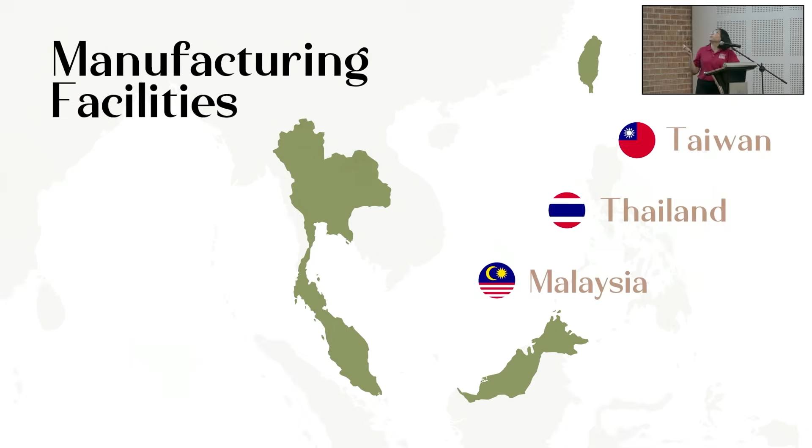We also actively export to the US continent. For the ISO certification, no worries, we are equipped with 45,000, 9,000, as well as the 14,000. We are also equipped with the SIRIM Eco-Label certifications, Singapore Green Labels, as well as the US LEED.

For the showrooms, we have 2 showrooms under the Suzuka HQ governance. The first one will be our HQ office, the manufacturing plant, and also the showroom in Klang, Setia Alam. Another one is in Mont Kiara, Wisma YNH.

The other showrooms are actually under our cooperation with dealers and distributors. We have worked along with developers like SP Setia, Sime Darby, Eco World. We are also working with some retails, maybe some hotels like JW Marriott and some Agodas, and the car brands also.

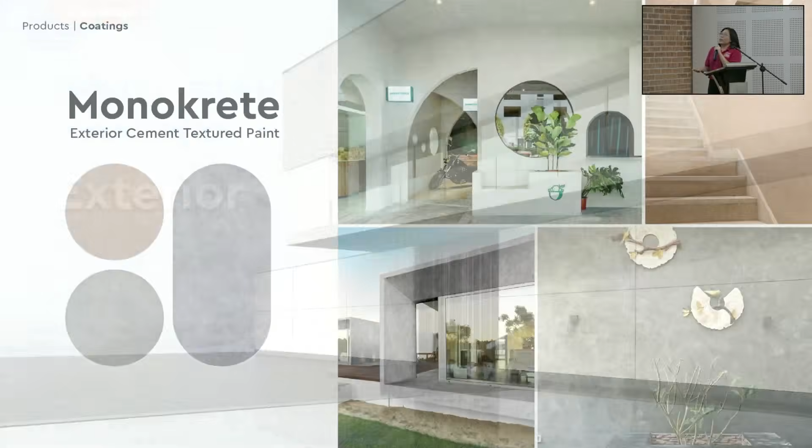For wall finishes, you can always choose between these selections. For the coatings, we have series and solutions for interior as well as exterior. For exterior, we have this cement texture finish. In the market, I think we're the only one with this solution for exterior, basically mimicking the cement texture.

It's low in VOC and it's water-based paint. It's also applicable for the ceiling, meaning if you have any semi-outdoor area, you can use this solution for the wall up until your ceiling.

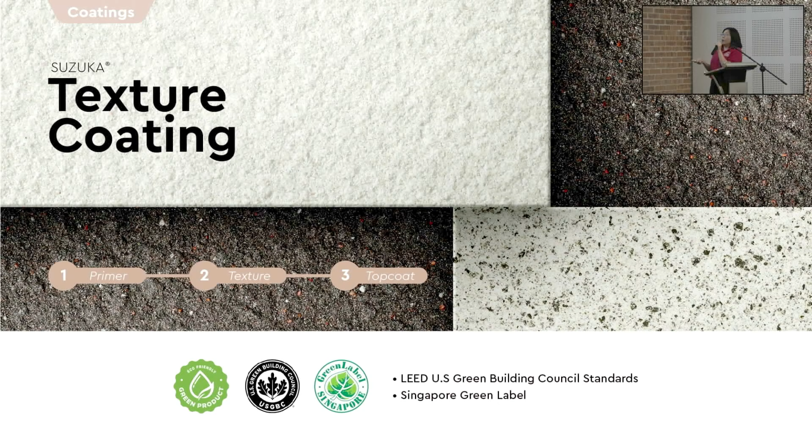Another one is the texture coating, which is quite common in the market, sometimes called spray granite. This one also has green label certification, no worries. Basically it has 3 different textures, meaning 3 different roughness levels.

The first one is the magic granite, which is the roughest amongst all. Only this series has the gold mica, because the particles are big enough and our gold mica almost mimics their black dots. If I put the gold mica in the other 2 series, it will look odd.

So the stony coat is the middle roughness, and the ceramic coat will be the sandiest version. These are all actually for exterior.

Can it be used for interior? My advice is better not, because it's quite rough. But if you would like to use it interior, maybe above the head portion, or something like a feature wall where you have something in front that can block it - this is for safety issue - otherwise choose the finest one, the ceramic coat.

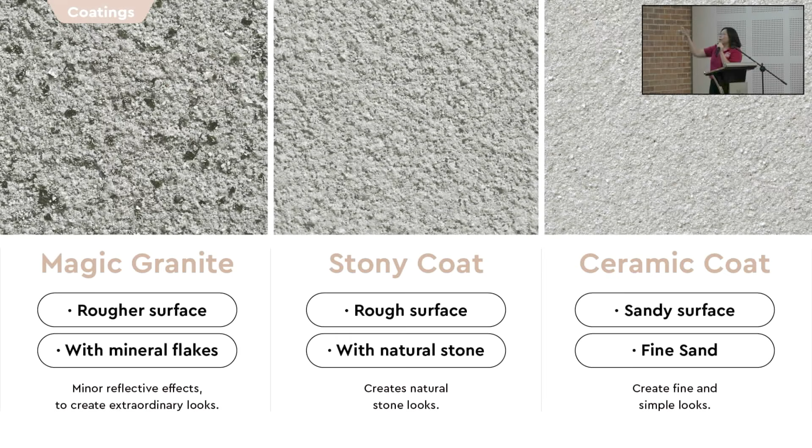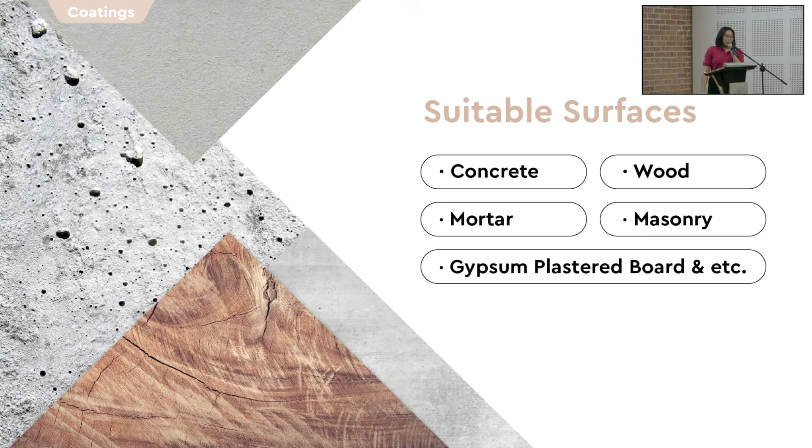It can be used on concrete, wood, mortar, masonry, gypsum, plasterboard, everything, except metal. For metal, if you would like to use it, the only solution we can allow at the moment is stainless steel, 304 or 316. However, please let us know earlier, because we might need to change the primer into a solvent base.

So it's quite resistant to stains, and quite easy to wash. Just use a low pressure water jet and that will do.

So if anyone is very afraid of lizards, some architects still prefer to use this range because it can prevent them. This is the feedback they gave me.

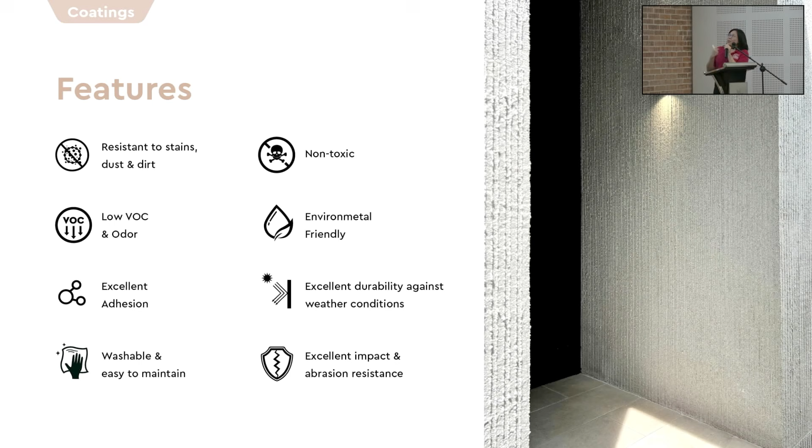This is using the spray method, meaning at curved areas it won't be an issue. However, this is actually at most 3mm thickness. So if you would like a very deep groove line or any recess, please build the structure yourself, and we will spray accordingly.

So the groove line is actually created by their own partitions, and we just spray accordingly. This is also just 3mm, meaning it will follow exactly your substrate.

This is not a design, this is by their surface. So if you would like another type of design, something like stencil or brick types, we can create groove line designs too, following your intervals and your design.

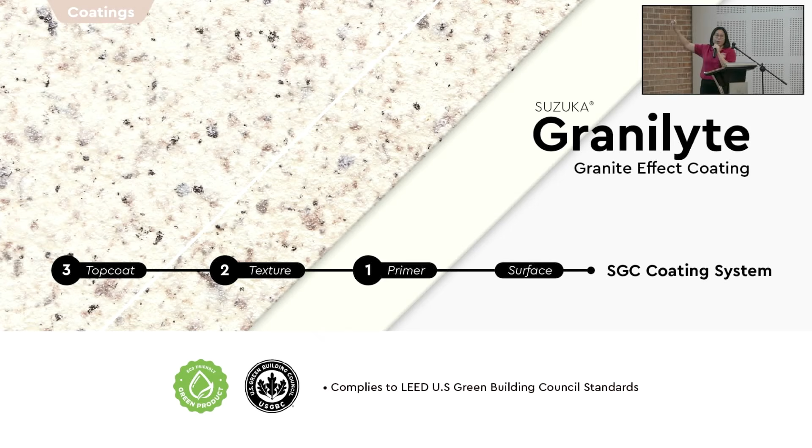So that previous one is rough, by natural stone and minerals, a little bit rough. If you're looking for a smoother texture that mimics granite, this is another solution for you. We call it the granite effect, coating Granilyte. This is how it applies.

By default, our system will be 2 layers of primer, 2 layers of texture, and 1 layer of top coat. So when you receive any quotations from suppliers or the main contractor, please ensure they are really following the system. Otherwise you can get the BQ, or the specification description, from me.

Compared to granite, this is actually lighter, and it's also quicker because it's just sprayed.

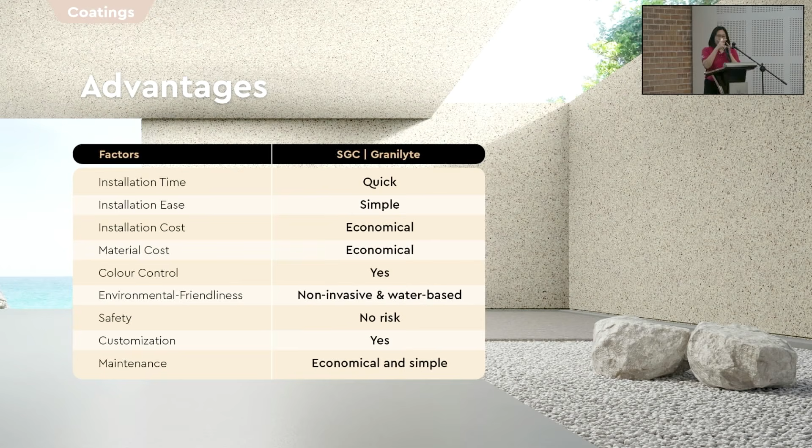This has some elasticity in the coating, meaning if your substrate has hairline cracks, it can somehow still heal up. It's also washable and easy to maintain, resistant to stain and fungus, and it's also a spraying method.

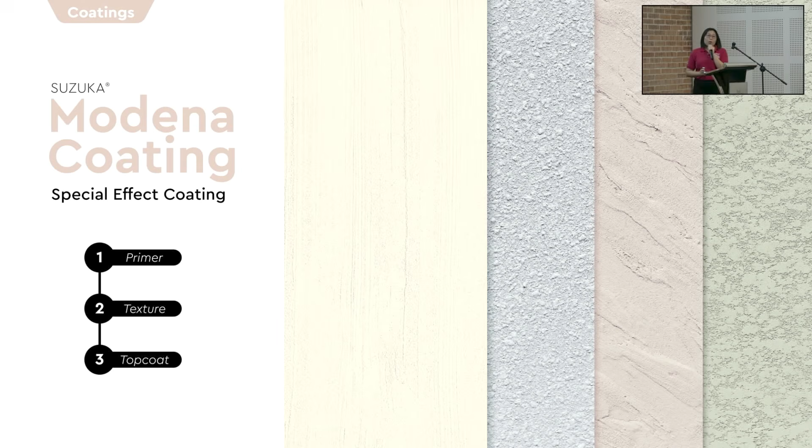For another solution, this is the special effect coating, we call it the Modena. Every single pattern is created with different tools, and it's also a green solution.

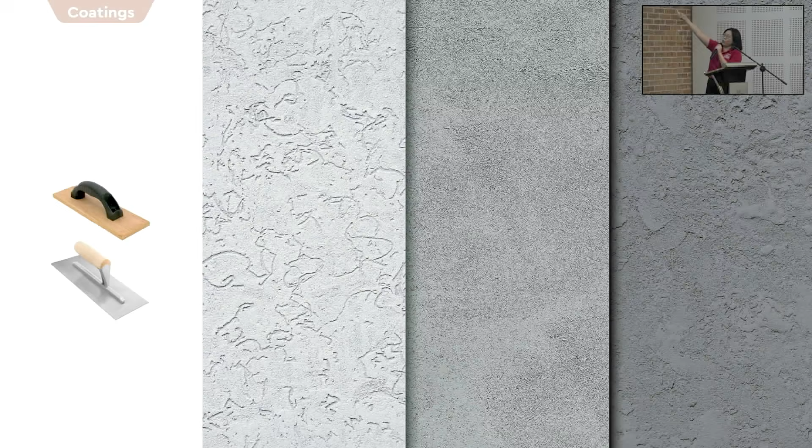These types of texture are created by the wood trowel and stainless steel trowel. These types of texture are created by the trowel and brush combination. This one is by roller, and this one is somehow a combination of spray and trowel. The travertine types are quite common, and this is quite the hot seller texture, I can say.

Every color you see here is available with every texture. Their only difference is the texture, the tools they are using.

If you would like to customize your own color, can it be done? Yes it can. You just give us the piece of the actual color that you need, and we match it here. Since we are the local manufacturer, it's quite fast.

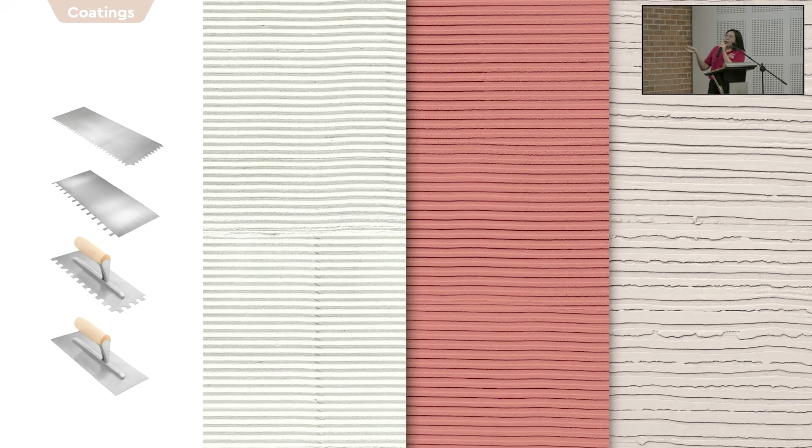This is the comb trowel type. But if you are really proposing this type, we might need to manage your expectations, because it is somehow human workmanship, so there might be overlapping or imperfections happening.

This is how they do it. For the image on the left, you see it's a little bit fluted, a curved fluted design, but actually that is the surface prepared by the client. We just spray on top - this is not created by us.

It's quite fun to play around with different textures to apply to different areas based on your desired design. You might also see this moon shape.

It's quite common in Japanese restaurants nowadays, and also some spas. This is the comb trowel type and the lines type.

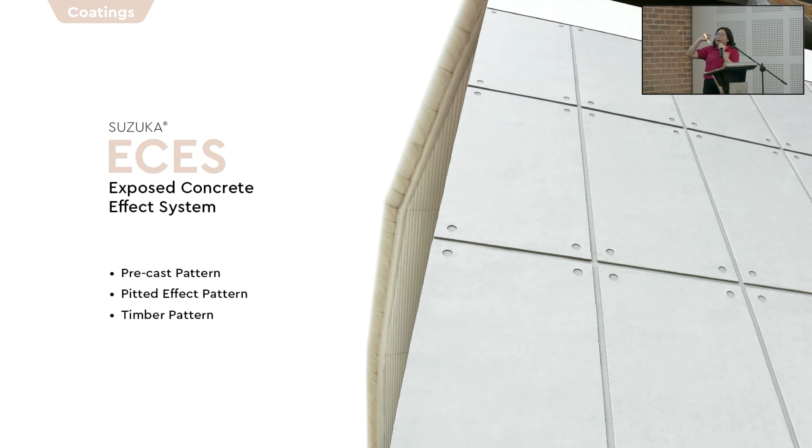Okay, this is another solution we call the ECES, the exposed concrete effect system. So this is not a panel, this is an in-situ coating type. We actually have 3 patterns, and the most popular one is the precast pattern.

So why do we have this? Compared to raw concrete precast, what's the advantage? Raw concrete may have the issue of efflorescence. So how do we counter that? We actually add an alkaline resistant primer to avoid that efflorescence issue.

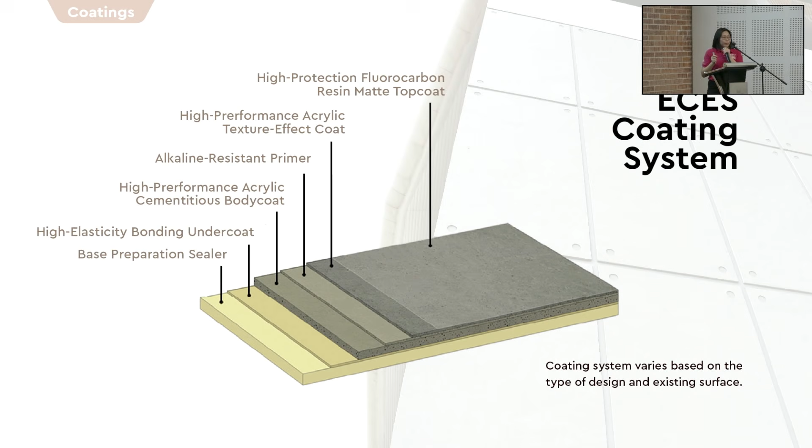So we need to build up the body of the coating to around 4 to 5mm before the texture. To create the pattern, the groove line is created with foam tape. The foam tape is normally 10mm width with 4 to 5mm thickness, so the thickness is at most 5mm.

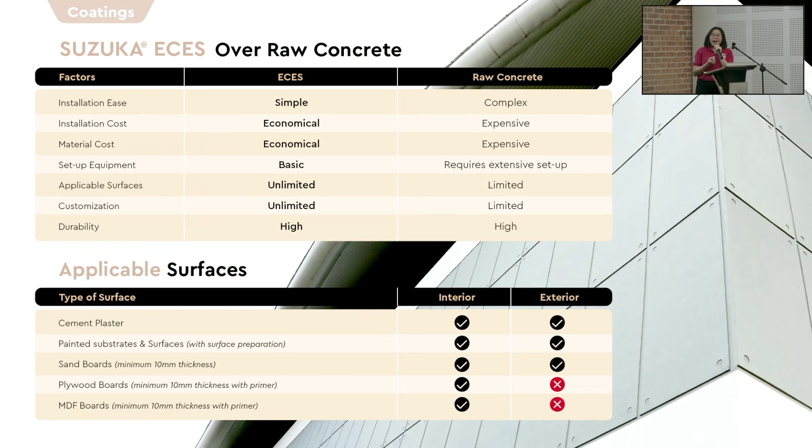So it's quite flexible, because when you do it on site, sometimes you might want 1 meter lines, 3 meter lines, or 2.5 meter lines. If you're using a panel, sometimes it's already pre-made and prefixed, but this one is very flexible on site.

And the buttons, or what we call circle shapes, you can control how far you want it away from the groove line, or you can not want it at all, no problem. For odd shapes, if you're using a panel, the wastage might be high, but with coating we can adjust accordingly.

Also at the very corner, if using the panel type, you will see a 90-degree corner termination, but using the coating, you won't have this issue. You just follow according to your wall.

The second is the pitted effect pattern. This only comes in one cementitious color. It's like holes on a wall.

The third one is the timber pattern, which we create with a silicone stamp. After we build up the body, we just stamp on it. Because it's silicone, it can be used on curved areas too.

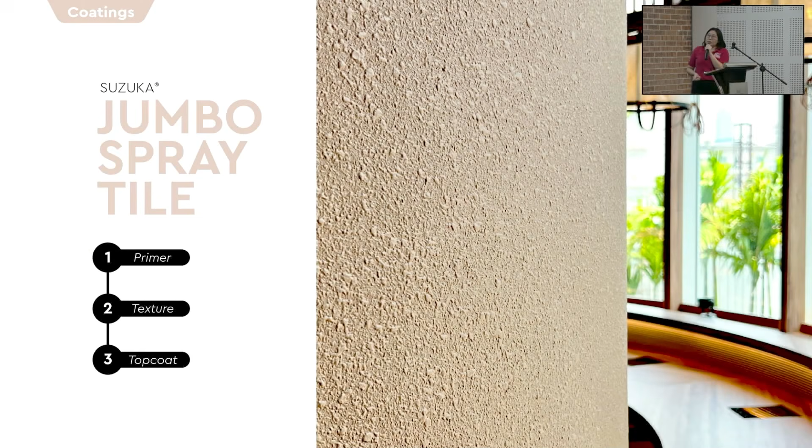You can paint on top afterwards if you want it in other colors. This is very conventional, something some people might not be aware of - Suzuka also does spray tiles, but we only supply them in white.

We have jumbo standard and also head cut types, both available in small, medium, and large size. It just depends on the nozzle size. Afterwards you can paint emulsion paint on top.

So that's all for the exterior. Now we move into the Strato series, which is the interior texture paint. As long as you see Strato, it means the interior paint, and it can be used for interior walls up to the ceiling. It's also a low VOC, water-based acrylic paint solution.

We have quite a lot of range and different textures - maybe you can have a real touch of it in front of the booth later on. I'll just quickly run through. This one is somehow a little bit matte, mimicking the travertine texture.

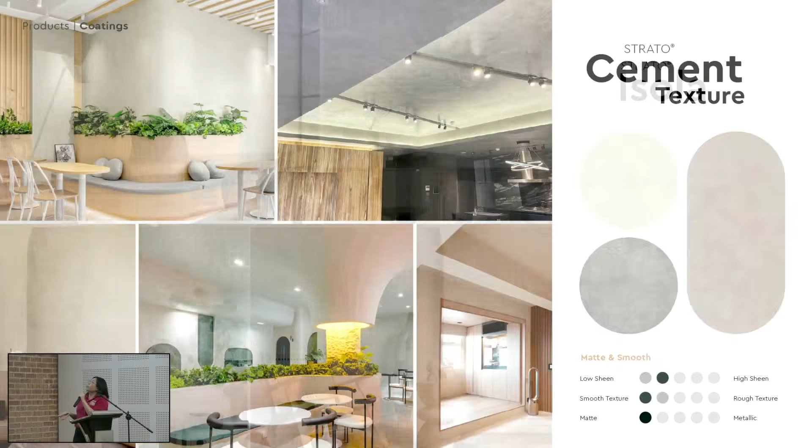We also have cement texture, which is more of a grayish tone. For cement texture with colorful or dopamine tones, we call it Veloce. So this is how they differ.

They're also different in the patterns using different tools. By default it will be with trowel, but if you're looking for a busier pattern or texture, you can use the piccolo. Normally people only choose the piccolo pattern with very light tones, because if you're in a very dark tone and still create this busy pattern, your interior will look like there's no focus.

Because normally you'd like to showcase your furniture, right? It's not about the wall. So it really depends on how you want the outcome to be.

We have the metallic, a little bit metallic - not a very metallic type, just a slight sparkle. You can choose Aurora or the Satin.

We also have a very matte option with a bit of a touchy feel, called Linen. And then we have a very metallic solution we call Merino - this one is rough, and this one is a flat type metallic.

For Organza, by default it will be piccolo because it's too flat - if we don't do piccolo, you won't see any effect, unless someone is really looking for a very subtle pattern, in which case they'd go with trowel. This is the Cashmere, also metallic, and this is the Taffeta, just mimicking the water reflection pattern.

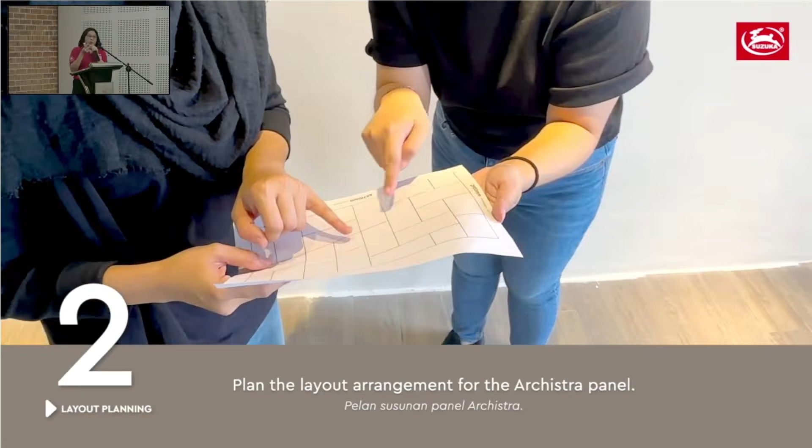So we do also have the wall panel like the PU stone, so have different types of texture. So this is one of it. It's super lightweight. In our showroom, actually 2 girls just installed it.

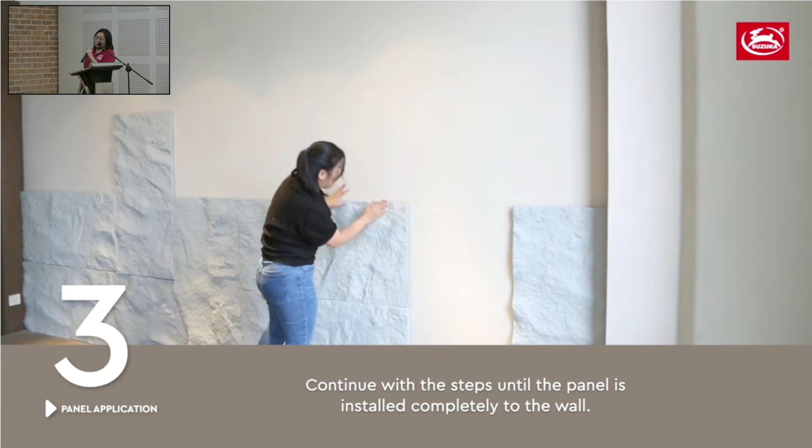Actually play around with a random, or you want to stack it up. It's also a fire retardant rating of B1 DIN standard. So you can actually create a seamless pattern also for some profile.

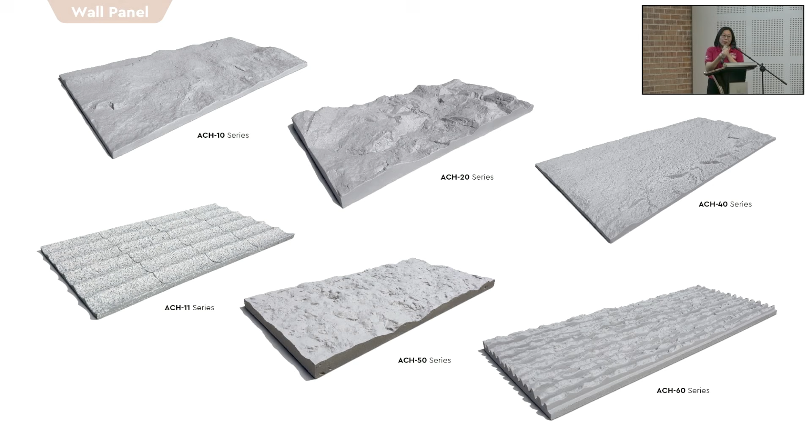So this is a paintable profile, meaning if you don't like our provided colors, you can buy the white colors one and paint your own. Maybe you want to paint it pink color, yellow color, also can. But we have 6 colors lah.

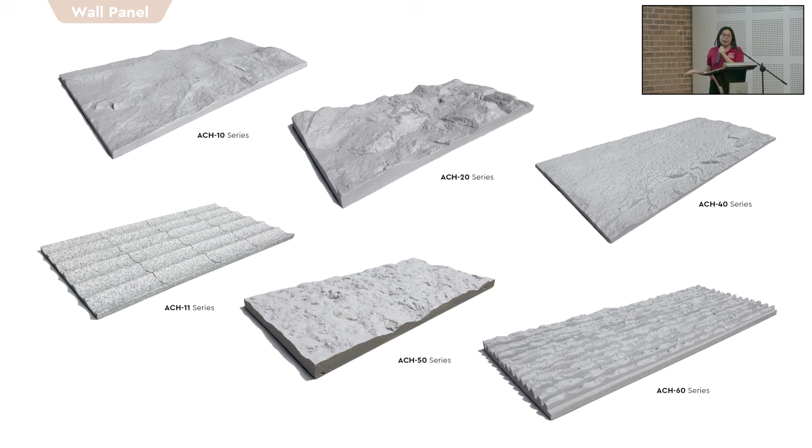So for the top one, it's like mimicking the stones. You can actually mix match the profile, and for the underneath one, this is also more like the fluted types. So you can have the standard one or the seamless one.

So this is how it looks like for the seamless. Mix and match, different profile.

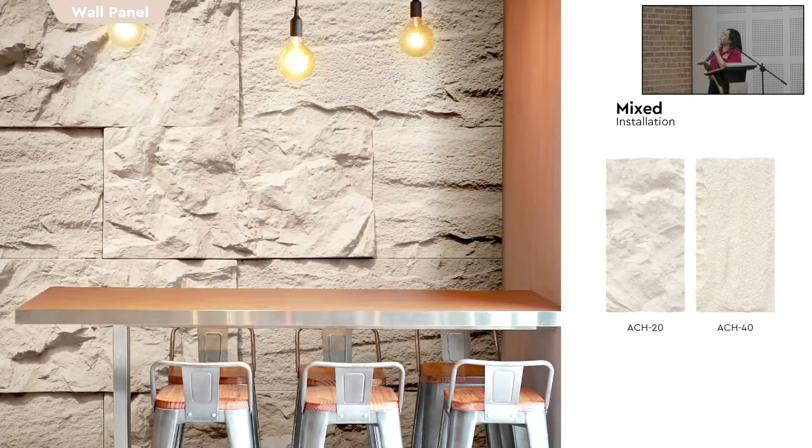So we do also have the brick veneers. I won't go through all, just selected. So for our brick veneers, normally the hot sell is the BK31.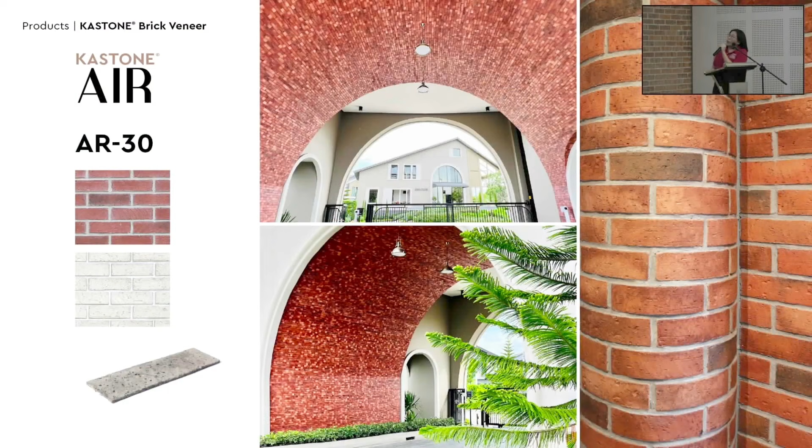So for the KASTONE AIR, this is actually catered for the curve area. Last time before we had the curve or bendable profile, we actually created it by cutting segments, right? Yeah, it won't be nice. So we just purposely created this profile for the curve area.

And then this is for the interior partition wall. If you have interior wall that is with brick structure, still go back to the BK31. This one is only for partition wall because it's thin enough to hold it.

So for stone veneers, we do also have the green labels. Just go through this one. It is with random shape.

So if contractors are only buying and installing themselves, like some tile layers, make sure they dry lay it once for you first before they put it on, because we've encountered cases where they actually put all the big ones at the top and the small ones at the corner. Yeah, this is somehow not the accurate way. To prevent that, make sure they dry lay it once for you first.

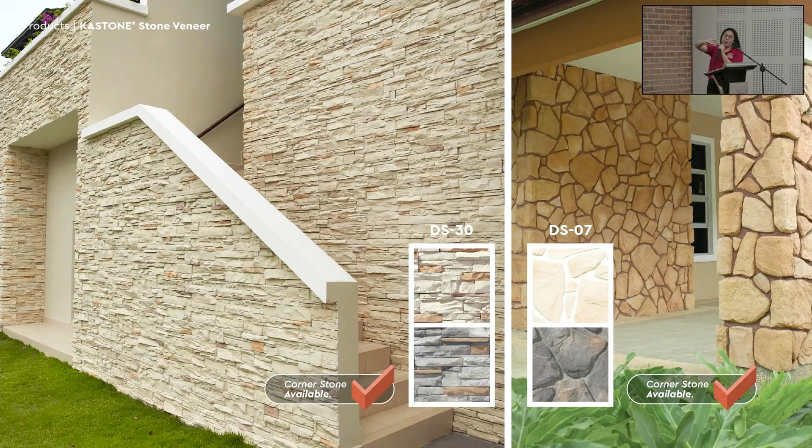So we do have the other stone veneers as well, maybe you can check on our website. So these are the random ones with the corners.

We do have the garden pavement stone as well. We just put it on top of the greens. We have different profiles.

So this is the last one, the KASTONE EG, playing around with the geometry. If you place it like a diamond shape, diagonal, or the straight one, it will create a different effect, especially exterior, because we play around with the sunlight.

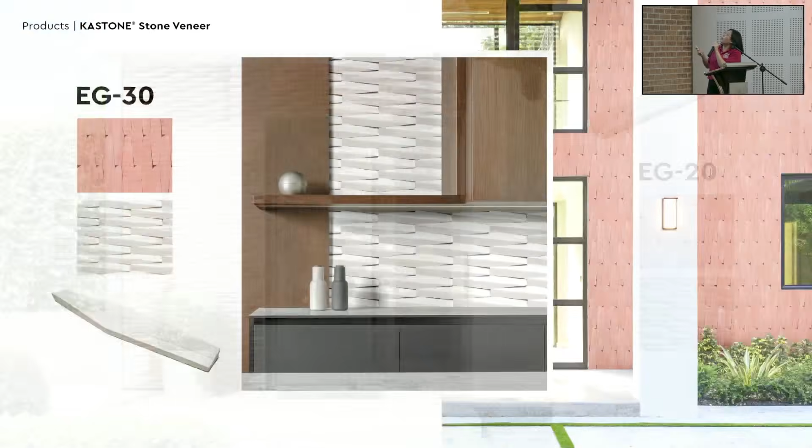So this is the feather light, the small feather, big feather, horizontal or vertical, it depends on you. So this is the floated type. Yeah, this is not a floated panel, it's actually made up of clay, cement and sand. So it somehow has some weight. Please don't put it on a partition wall.

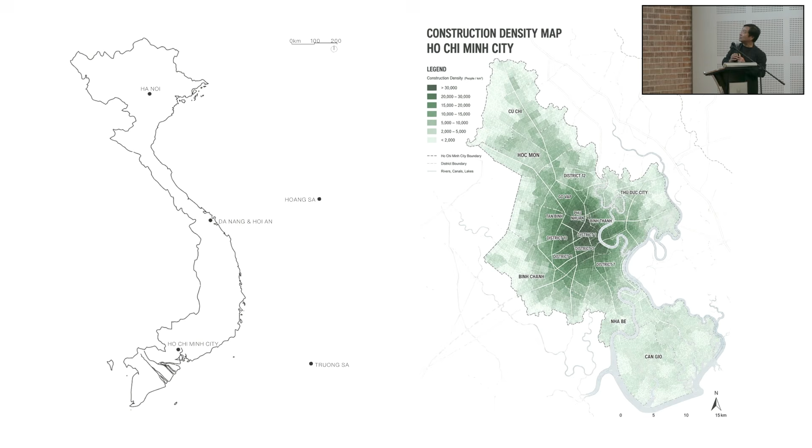Vietnam is a tropical country, same as yours, India and Thailand, very similar. The country is very long from north to south, and thin from left to right. On the left side is the west, which is two-thirds mountains for the entire country. All the settlement development is along the coastline, more than 3,000 kilometers on the right side. And this is my city, Ho Chi Minh City.

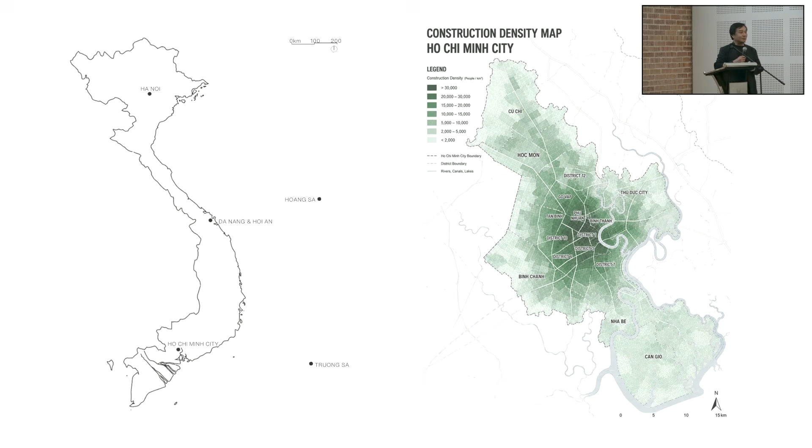Today it has become a very big city. They unified two different cities, so Ho Chi Minh City, already big, was joined with another city. Now going from one part of the city to another part could take about 6 hours, imagine that, plus traffic jams. The city population is about 15 million inhabitants. I heard in KL you have 4 million, so our city is 3 times bigger than KL in terms of population.

Vietnam, Ho Chi Minh City in particular, is one of the biggest economic cities in Vietnam. It's grown very fast, urbanized, with a lot of demand here and there. So it's come to the point where we have low rise, high density, totally lacking open space. If you compare with Singapore, Tokyo, Seoul, and Bangkok, I'd say now is the time for Vietnam to grow.

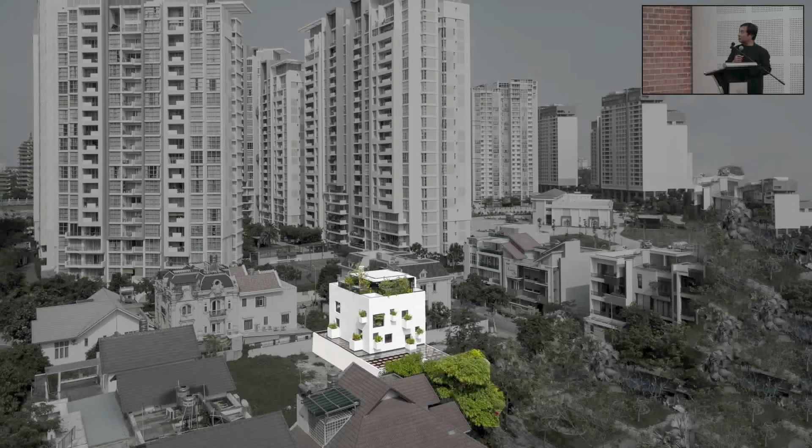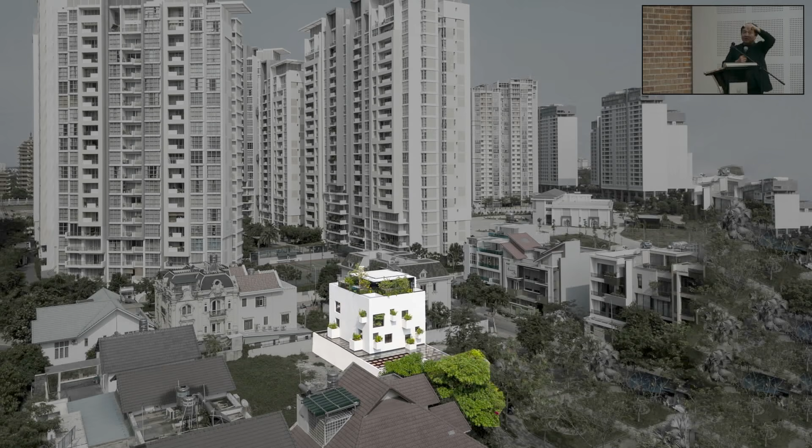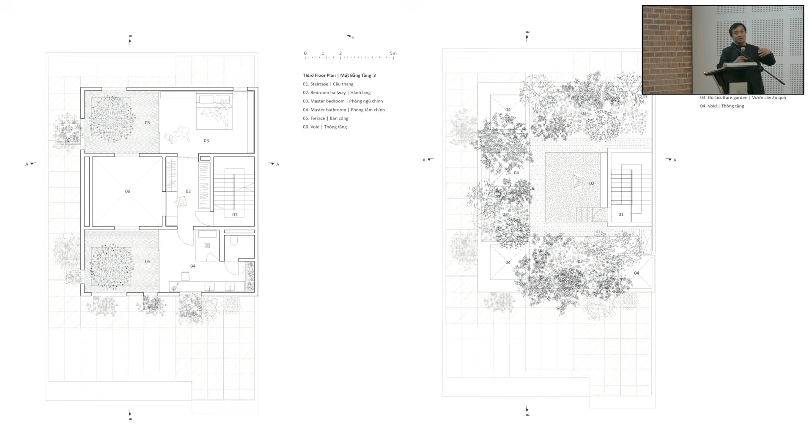This is what we call Sky House. Within the context, you see the high rise of Ho Chi Minh City all surrounding, and the house is nearly in a jungle of concrete. The architect's solution was to design the house taking half the space for physical living, and the other half for looking up. So this urban house is designed inward instead of looking out. That's why we call it Sky House - you look up to the sky only, not around.

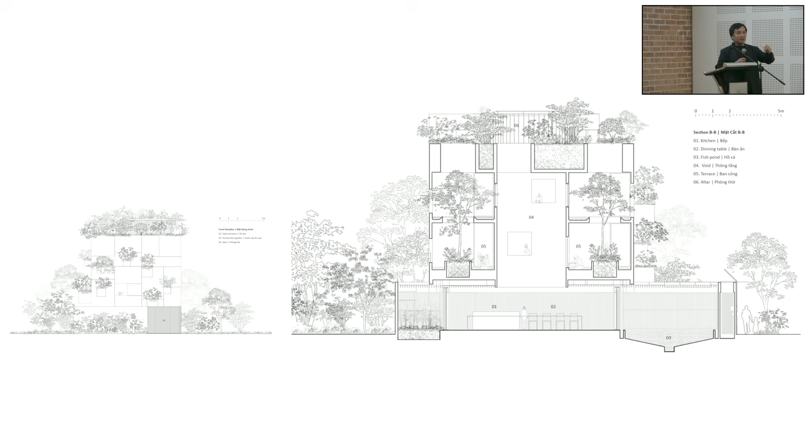We built a transition space between inside and outside, like a light filter, with plants and trees to cool down the house. It's a very interesting part - from inside, you look out through the landscape but still feel you're in the house, so in that space you feel yourself in touch with nature. The house is breathing during different times of the day. By sunrise and sunset, the shadow play is very interesting through the natural elements, reflected onto the white surfaces.

And then not only horizontal connection, but also vertical connection - between the human with nature, and the human and human in the family members. This is what we call, when you have nothing to look outside, so this is a solution to build for your own landscape, your own nature, to be happy with the architecture.

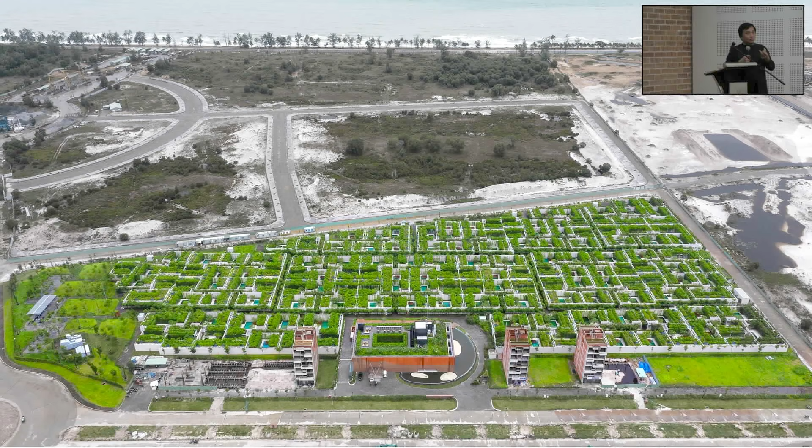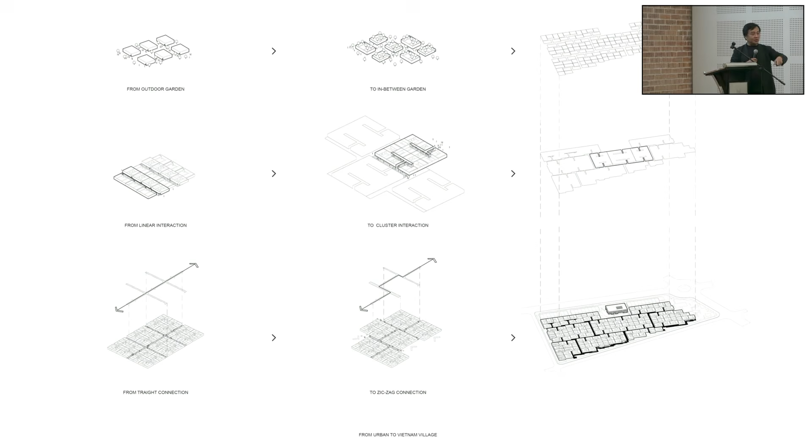And what we call, when we came to this and talked to our client - when you take the footprint, the amount of the footprint of the land, you build it, you sell it to the people. Can I ask you something? The amount you take, you build the project - can you give back to nature the same amount of landscape? So we succeeded in convincing our client to give back what they had already taken.

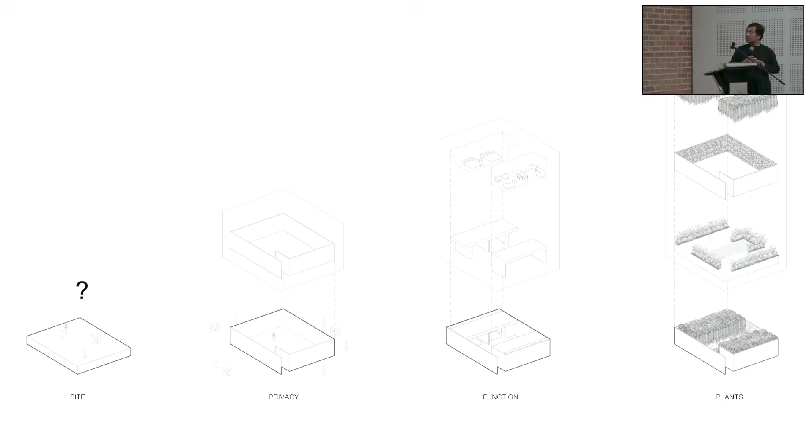At the same time, after finishing the project, it looks like a park. And we don't see any architecture, every corner of the property is hidden by landscape.

But I use very simple landscape, I don't use expensive ones. Landscape can be green, can be decorated, but here I use the local species, which is easy for maintenance and cheap to invest. So this hanging plant, all the landscape, becomes a functional part of architecture - that's the curtain, sun shading, and keep going one after the other projects.

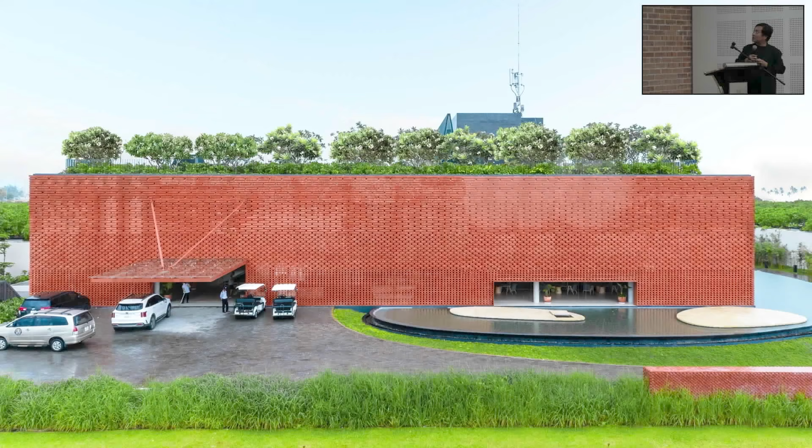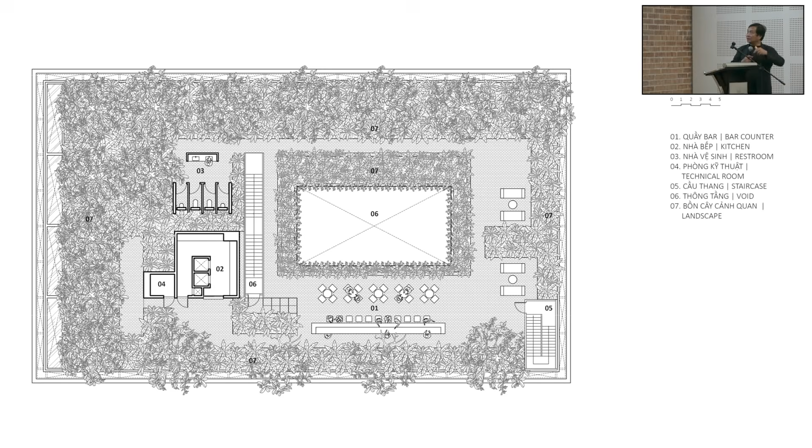And then the same thing for a simple clubhouse, where we also have, like you guys are also doing, a central courtyard, very simple form and blocks. And then we try to have light filters and also natural ventilation through the brick.

And I do it from bottom to up, depending on the function. So on the ground it will be more hollow, and then the same formula, same pattern, apply more solid as you go up because of the spa and other functions. And the rooftop is outdoor seating.

So the materials - it's very much like the way we use it, like the feeling of a Vietnam village, very easy look, but it has been transformed in a modern way. So you see, again, the connection between inside and outside.

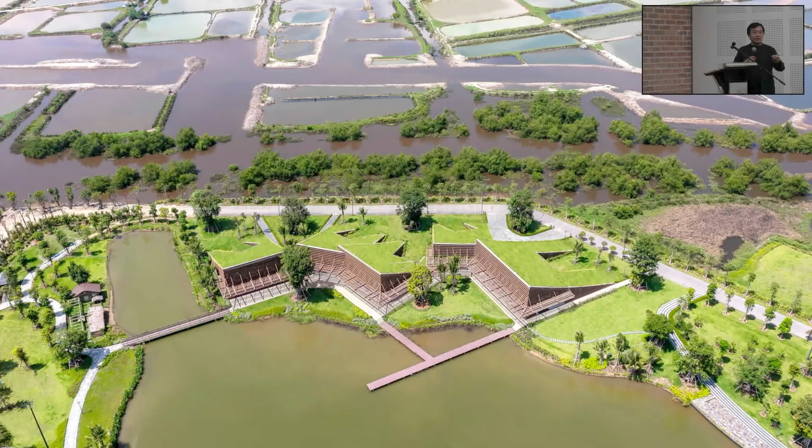So this project is what we call the park. We had an inquiry to do a big development for a residential project. And then this is a community clubhouse for residential, where you have the spa, children's playground, coffee, restaurant, and so on.

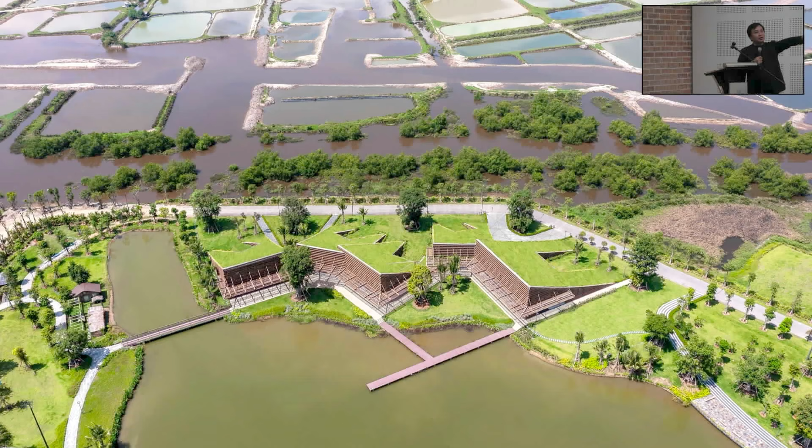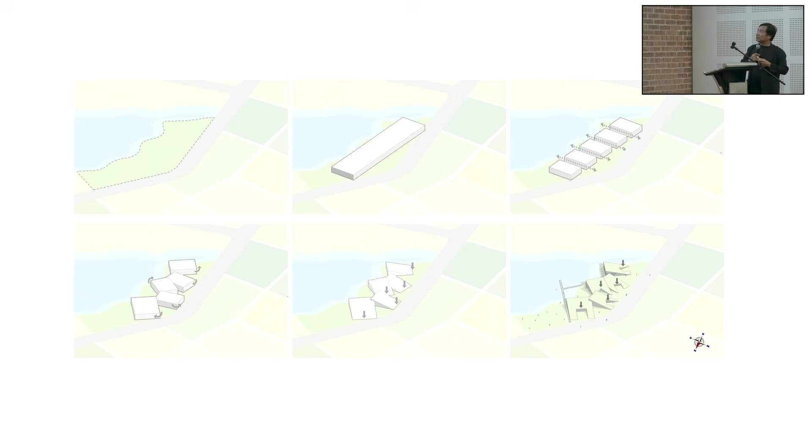So instead of doing one big long solid block, our solution is we subdivide it into small different blocks, and we orient it in an organic way, which tries to be in contact with the sensitive agriculture landscape. So then the architecture is in contact with the current landscape, and it becomes like the park, the new park. And when you walk on the street, you won't see the heavy concrete architecture.

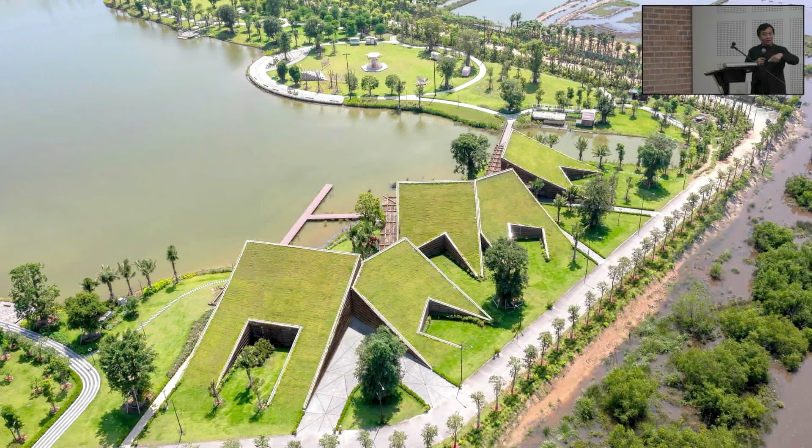So we are very happy to convince our client, which is not easy in Vietnam, to talk about the way architecture can be in harmony with nature.

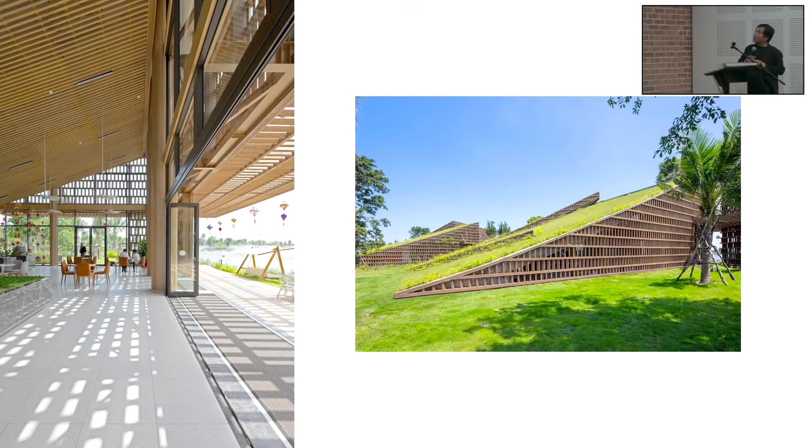So when you walk on the street, you feel this is not really architecture. It's part of the landscape. And the back is the west side, so actually afternoon sun we can't use it. We still had some small holes in between to create natural ventilation, but the main function is in front, facing the lake. This, the same principle, we just finished a few months ago.

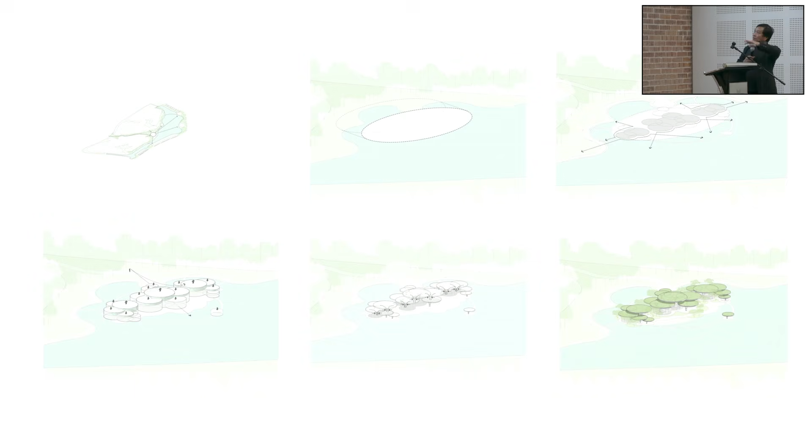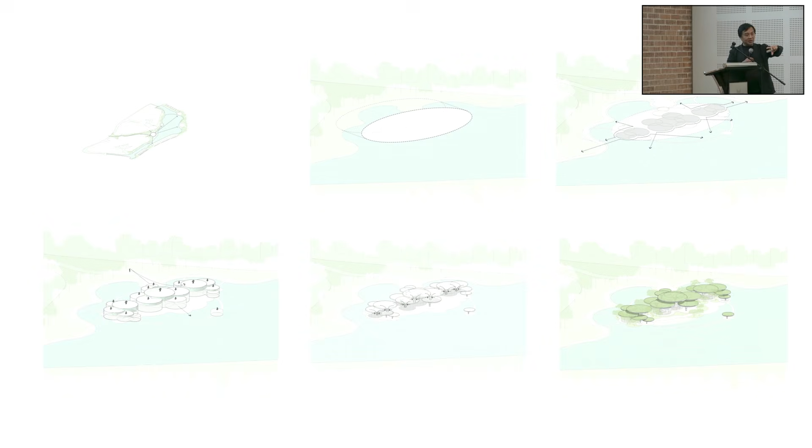Another clubhouse for residential areas, what we call the Lotus. The client asked for the project to float on the water. This area is well known for its lotus pond. Our solution was to create lotus leaves, big and small, low and high, with gaps in between, so the architecture becomes soft and allows natural ventilation and natural light to come in.

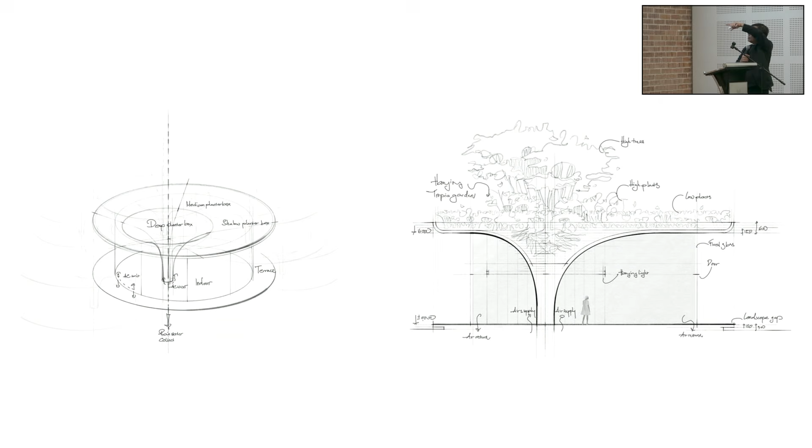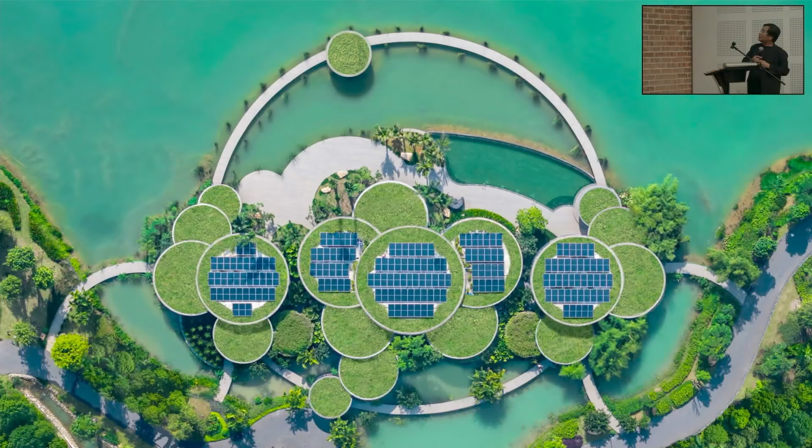Every single lotus leaf became like a planter box, where above the roof you catch the rain water, creating a very simple interior form through the structure itself. So that has been built.

From a distance, we feel very happy for ourselves. The architecture disappears, we won't see the architecture, which means it becomes part of the landscape instead of dominating it.

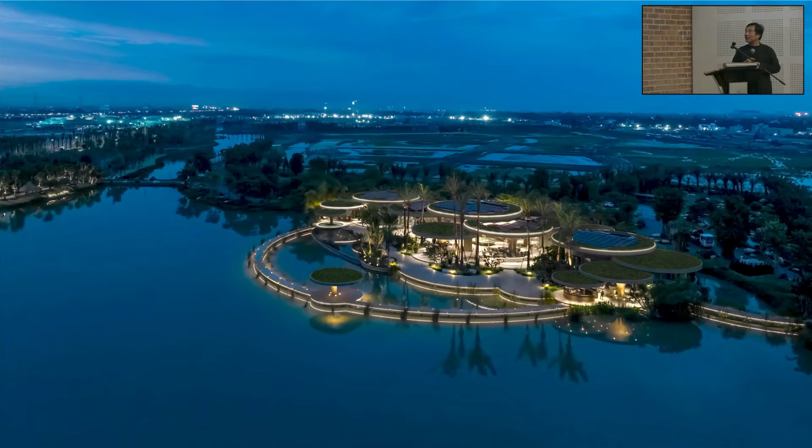Otherwise, for the interiors, we keep the structure itself as it is, with very simple tables and chairs, a feeling of outdoor instead of indoor. By having the canopy low and high, big and small, we create a picture frame where you can orient yourself looking outside.

That's our journey so far, and we keep going, hoping that a small piece of architecture can make a big statement and have an influence on society. That's how we hope. Thank you.